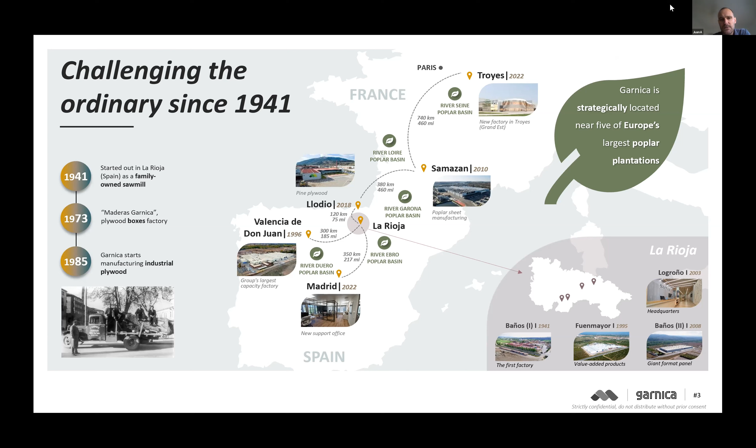Then we have Maderas de Llodio, a company that was included in Garnica 4 or 5 years ago. They were specialized in radiata pine, so now Garnica is also specialized in radiata pine plywood. Lately we have 2 factories in France that are specialized in producing veneer. Actually, the second one, in Troyes, is now running its first production batch. In the coming weeks they will be peeling the first logs, and those veneers will be dried in Samazan and sent to Spain to produce plywood.

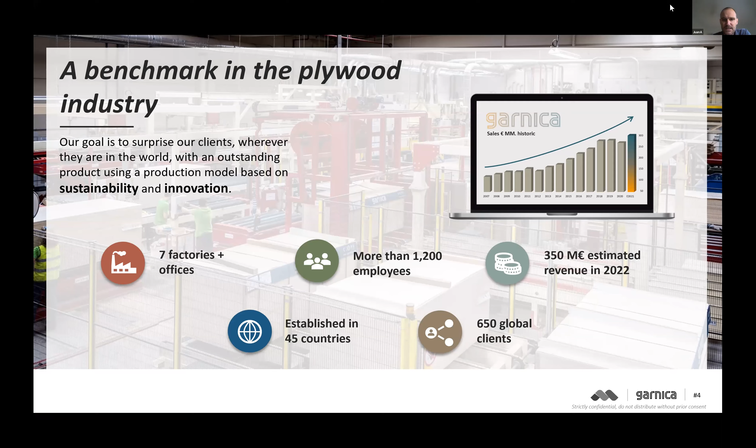So in total we have 7 factories plus the headquarters in Logroño and a small office in Madrid. We have more than 1,200 employees, and the revenue for the current year is a little above 350 million euros. We sell to more than 45 countries and have more than 600 customers. We find specific customers for niche applications and segments worldwide. Our products are well appreciated in specific applications, and that allows us to have this global footprint.

Actually, today North America is our first market. It used to be Germany, but now it's the United States and Canada. And of course, we grow, and as a forest-based company, the future is something we have in our DNA. We use wood from sustainable local plantations. Poplar is our main species, but as I said, radiata pine is also used, and in the last decade we've also started to use Eucalyptus globulus from Galicia and Portugal. Poplar is a fantastic tree because it grows so fast and has so many advantages, not only capturing CO2 but also cleaning the water, etc. It's a perfect ally for the decades that are coming.

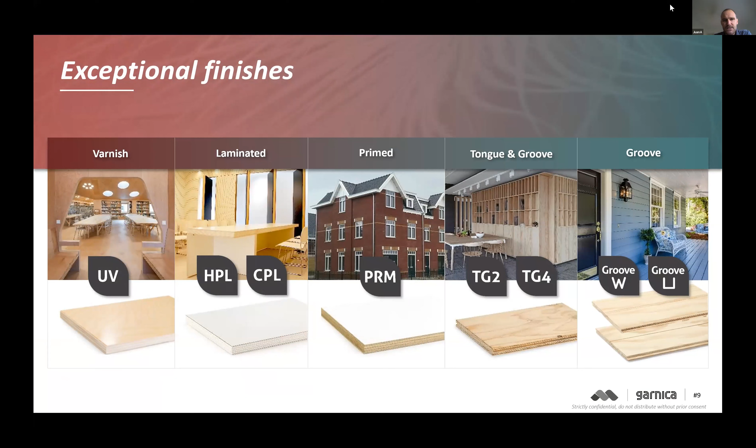We also make a lot of different finishes - UV lacquering, different mechanizations, priming, etc. - to add value to our plywood. These are the two panels most related with construction, and especially with the project. They are also used in Basajaun.

The one we call Durable or Duraply is a product in which each veneer has been individually treated before gluing and pressing. That means all the volume is homogeneously treated against fungi and insects, which makes the wood very durable. This is why it's used in exterior applications like soffit, fascia, and siding.

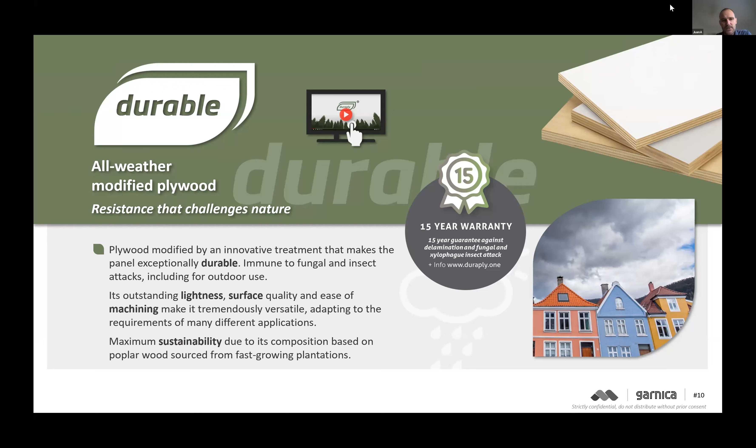besides some applications in tropical areas and countries. The second is the Fireshield, our fire-rated panel, which is B-s1,d0 classified according to 13501. It's still a very light product, again homogeneously treated - each veneer impregnated before gluing and pressing - which keeps the panel very flat and smooth, with a perfect surface to be finished wherever the end use is going to be.

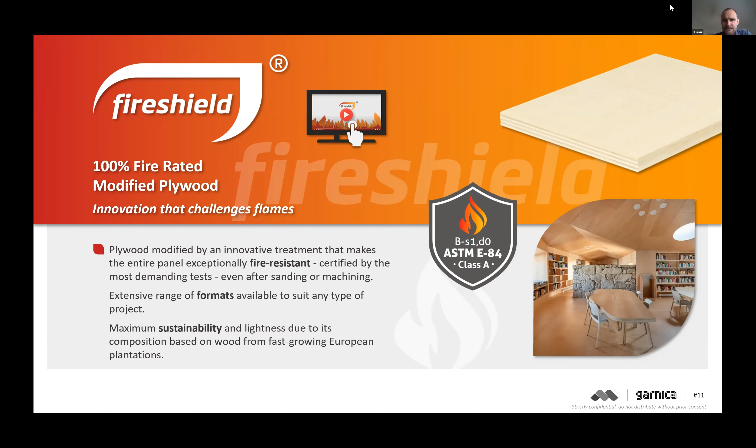With Maderas de Llodio, we also have the chance, along the pine or mixed with eucalyptus, to achieve very high mechanical properties. This is why we are now in a project to produce LVL - not in big sizes, but still LVL with very enhanced mechanical properties.

And finally, the G-brick - don't get scared because of the XPS core. I anticipate that the good point is that we have been able to test the construction process and construction method, and we have learned a lot with this panel, which is actually a very nice and interesting product because it is very light and still very tight and resistant.

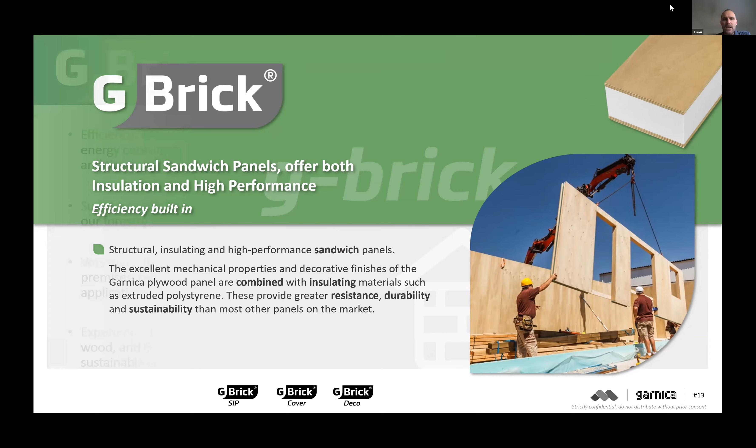That allows a lot of different building systems. It has the inherent advantages of a structural insulated panel product and construction system because of the efficiency, because of the sustainability in terms of the wood. You can always split the XPS and recycle it, then give another use to the plywood. Of course, it's better if it's all wood.

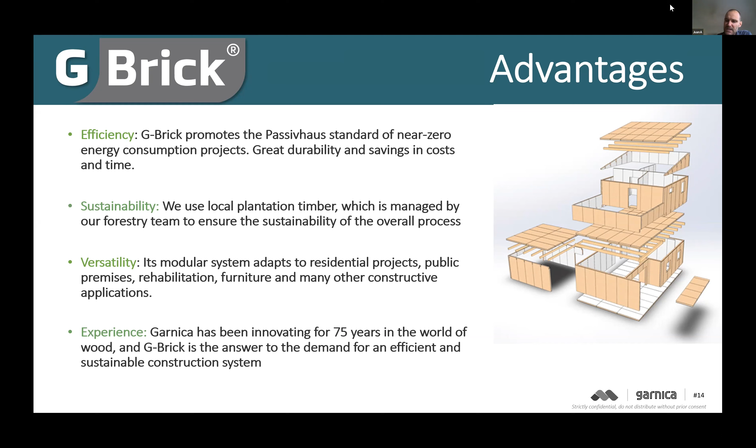The versatility - we'll see some examples now - and then the experience of a company like Garnica. When I talk about versatility, it means that it allows many different production systems. We're going to see some examples now.

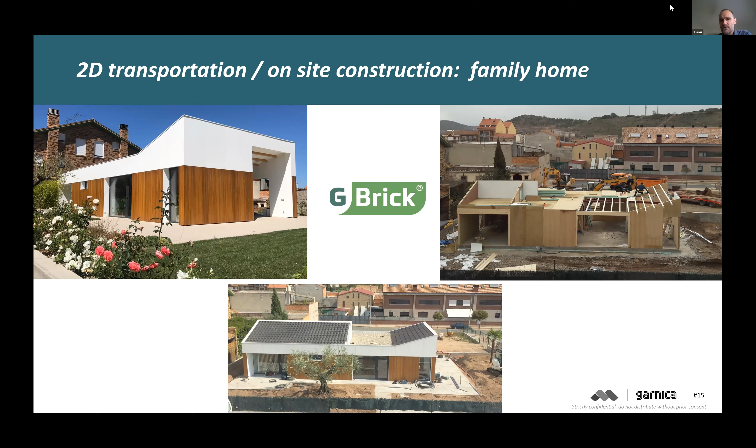This is a family home in which the panels are transported in 2 dimensions - panel by panel - in industrial dimensions, meaning 2.5 meters and 3 meters long per 1.2 meter width. Some panels are cut to a specific desired dimension at the factory with a CNC. It's like a Lego - you can easily put, weld, and install the different panels to create the different construction elements.

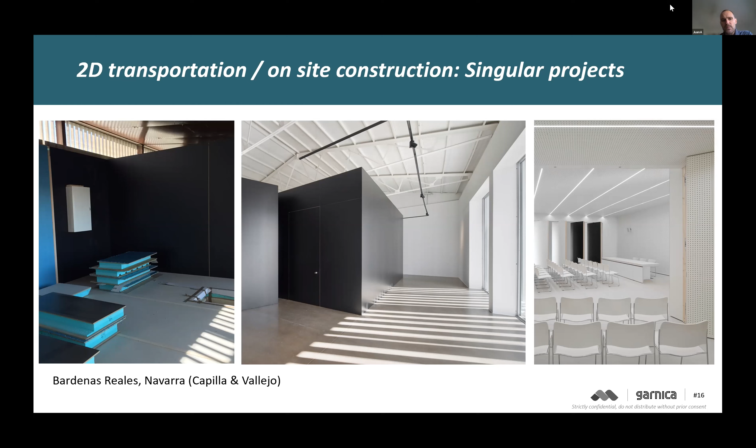With the same philosophy, it's also possible to make singular projects. In this case, it was a very nice project done in Bardenas Reales, and here the panel already incorporated decorative HPL.

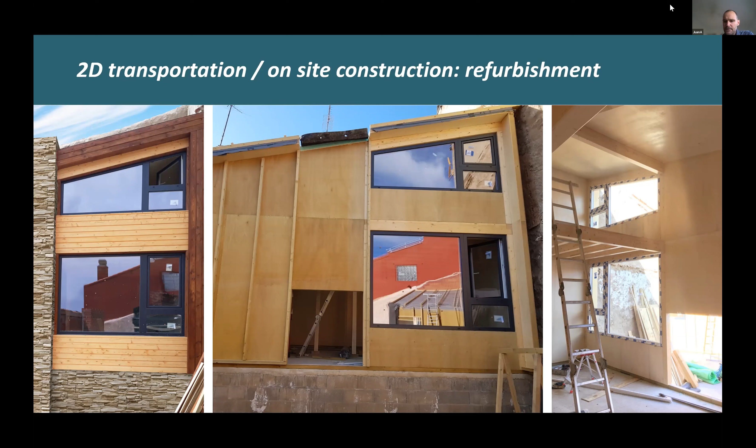It's also possible to make refurbishment of whole houses. In this case, it was a village, because the panel is so light that it's easy to handle - you can see in the picture in the center that is precisely the Duraply skin. In this case, the G Brick has been manufactured with a panel that includes the antifungi and anti-insect treatment.

Another very important application for us - actually our biggest market today for this product - is tiny houses, extremely popular now after COVID, when people want an extra room for guests, or just a place to work, a gym, or whatever.

In this case, the panels also arrive on site, 2D transported and handled. Each panel has a unique position and is previously CNC machined to perfectly fit the place in the construction.

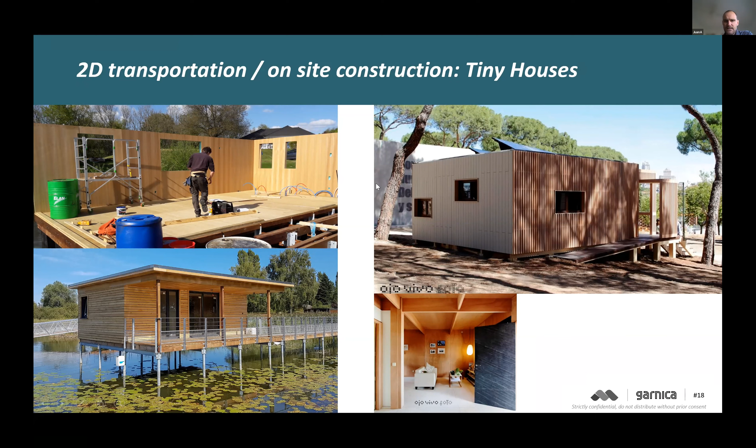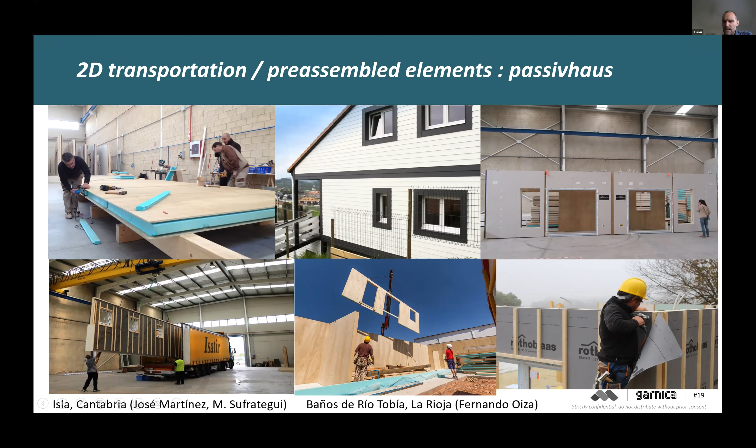The system also allows 3D transportation.

Sorry to interrupt you, could you speed up a little bit? We are really delayed already. Okay, perfect - it's very interesting, but please speed up a little.

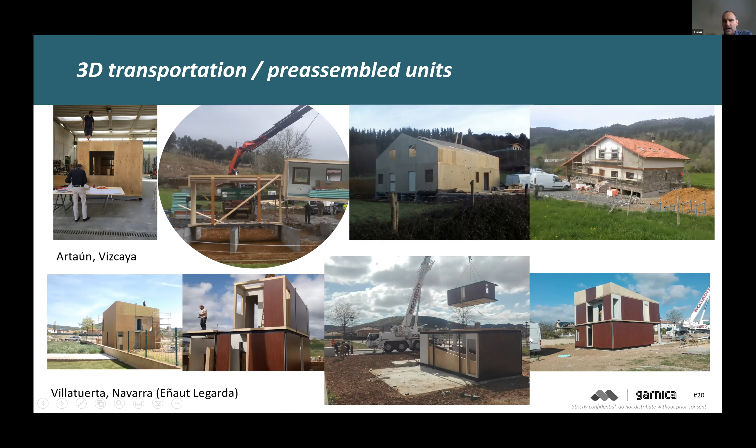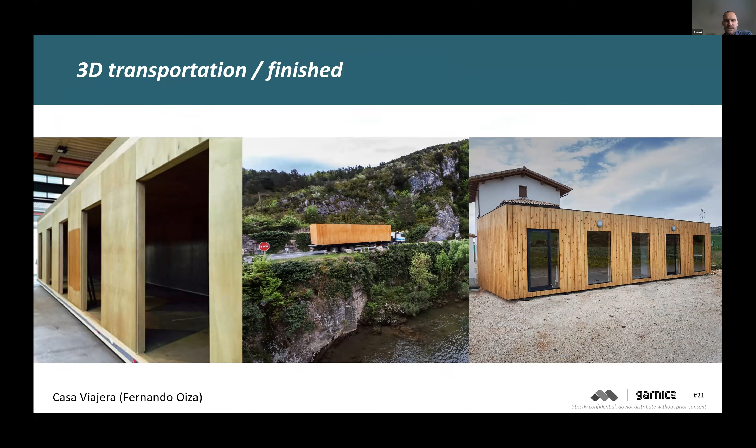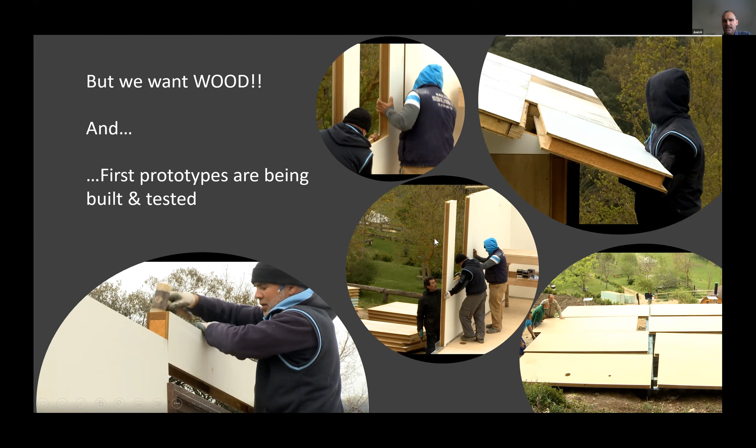You can see here a tiny house of more or less 45 square meters with wood fiber insulation, and we are quite happy with the results so far. That increases the possibilities of using not only thicker wood fiber, but also lighter panels for other applications, like the tiny houses I was explaining before.

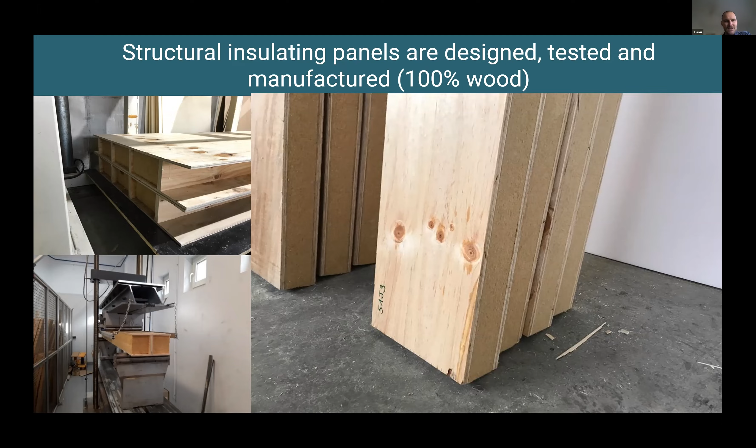Because I've seen so many nice pictures about Basajaun and the prototype that is coming, I think I can finish here. These are the panels - during these weeks we are actually producing the panels that will be used for the building, and we are all very happy to finally see this product in place. Okay, thanks a lot.